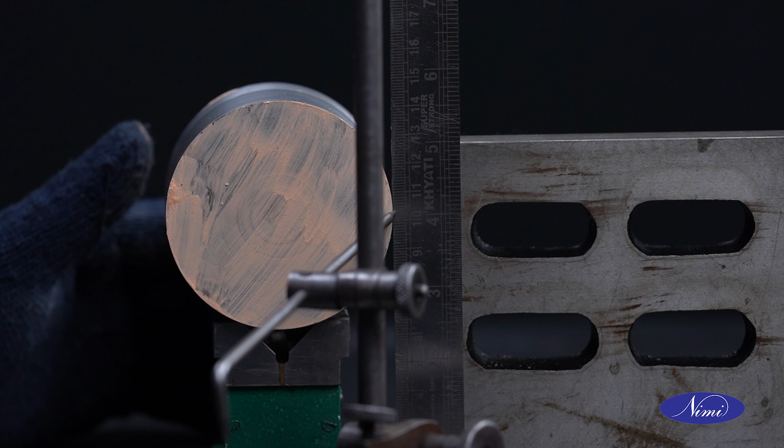Welcome to this session on eccentric marking practice and use of vernier height gauge and V-block. Let us begin with the session.

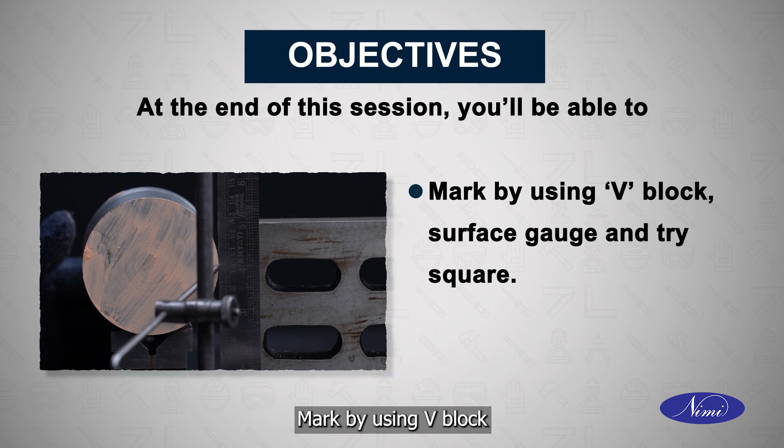Let us now look at the objectives of the session. At the end of the session, you will be able to mark off the eccentric center for turning external diameter, mark by using V-block, surface gauge and try square, and mark concentric and eccentric center lines of a job by using a vernier height gauge.

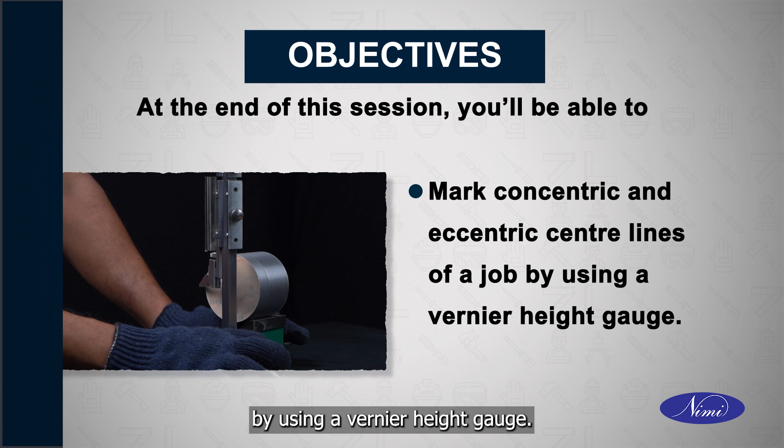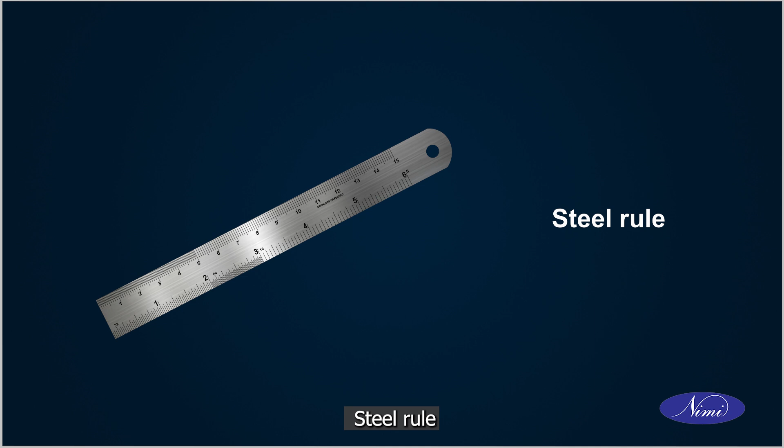Now let us learn how to mark concentric and eccentric center for turning the external diameter by using V-block, surface gauge and try square. The material and tools required for this exercise are V-block with clamps, surface gauge with scriber, marking media, try square, angle plate, steel rule, plain turned MS round of diameter 80 mm, surface table or plate, anvil, ball peen hammer, dot punch and center punch.

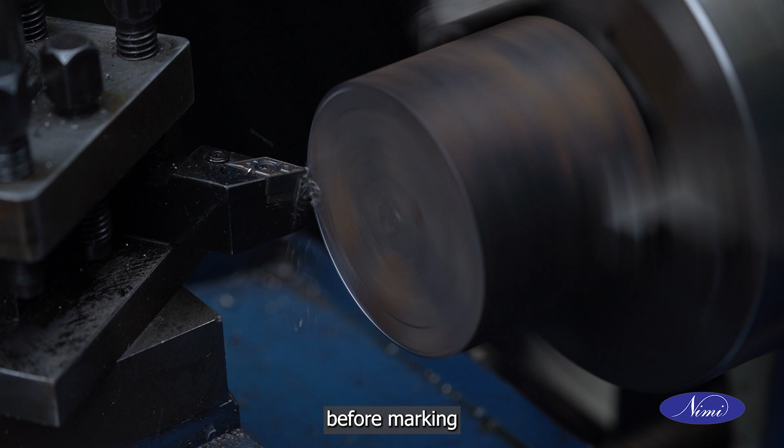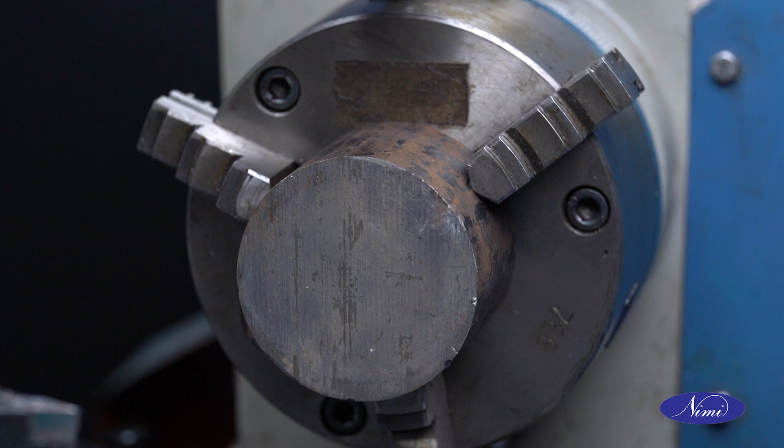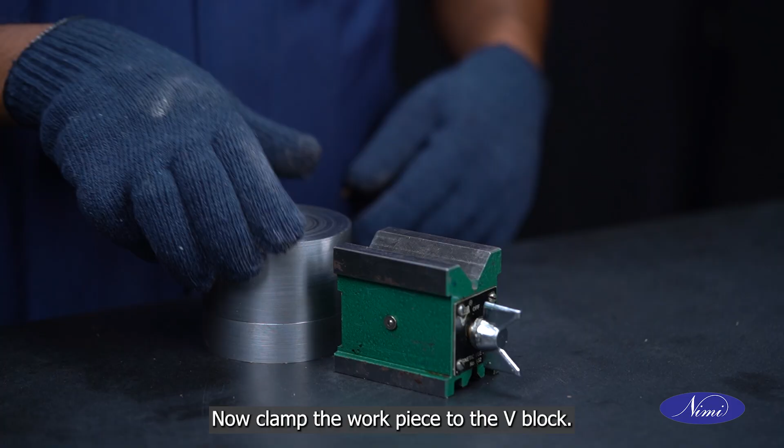Before marking, the job must be faced at both the ends and must be free from burrs and sharp edges. Ensure the diameter of the workpiece using a vernier caliper and check the length of the workpiece. Now clamp the workpiece to the V-block.

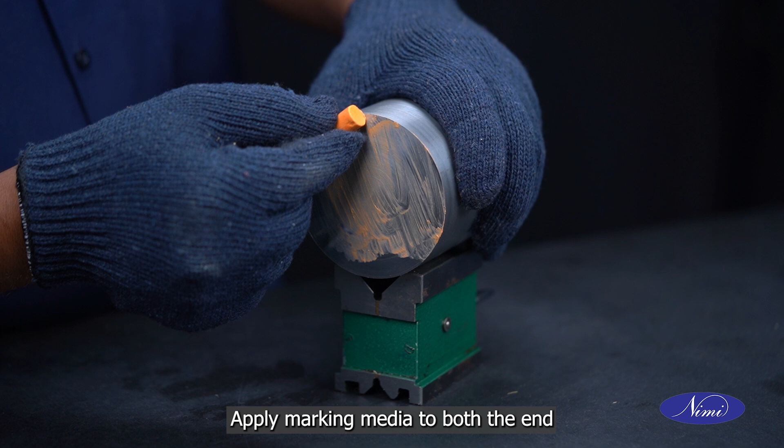Apply marking media to both the end faces of the workpiece.

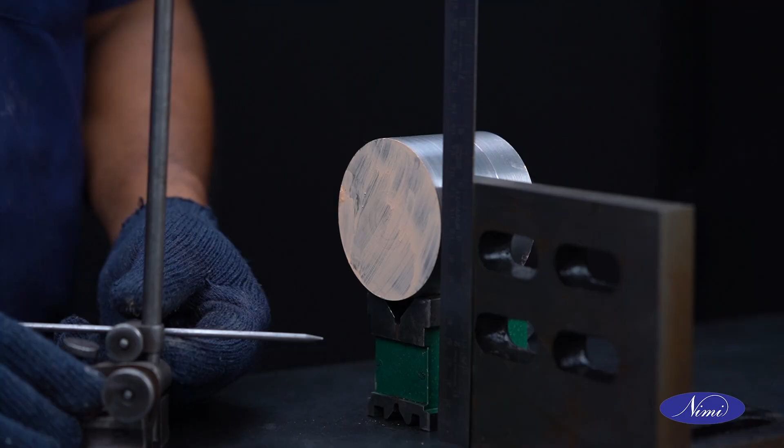Now, with the help of an angle plate and a steel rule, set the height of the scriber to locate the center of the workpiece. Scribe horizontal lines through the center of the workpiece on both the end faces.

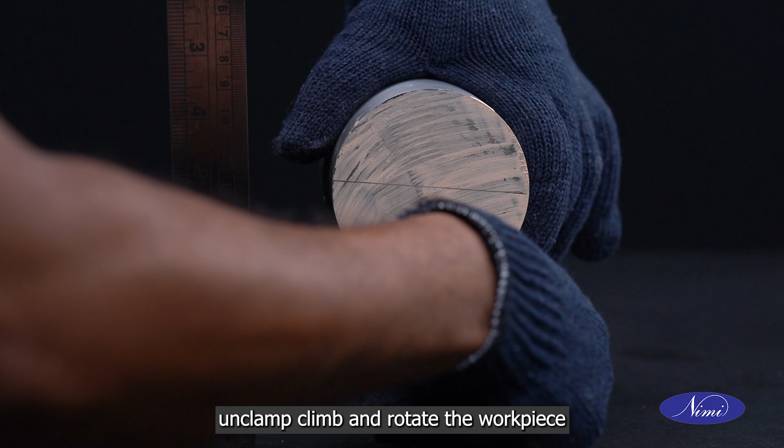Unclamp and rotate the workpiece through 90 degrees by setting the scribed line vertical with help of a try square and reclamp the workpiece.

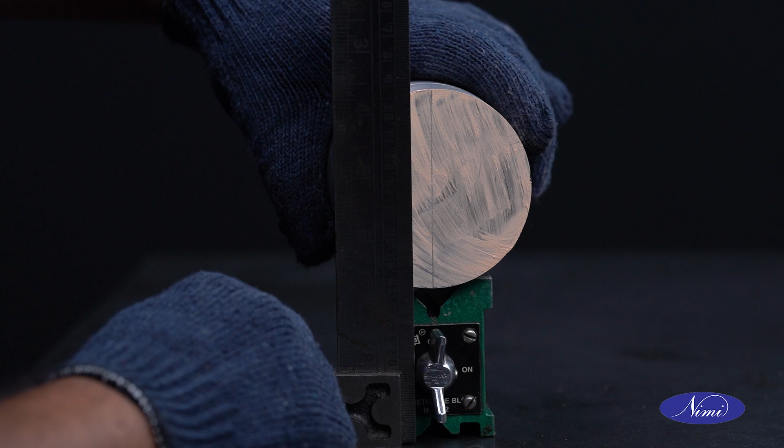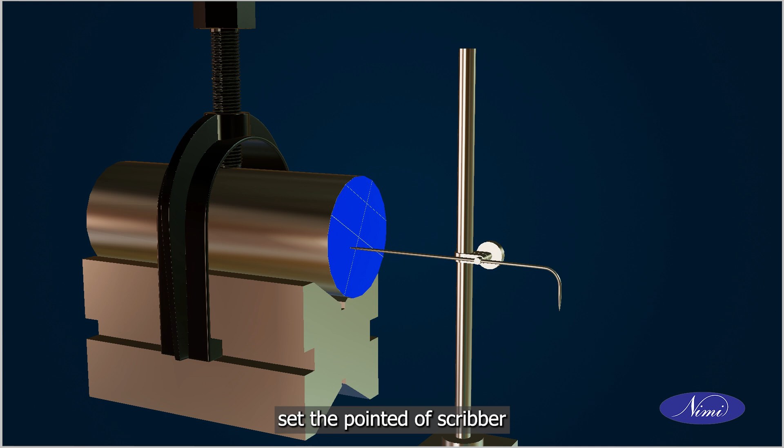Scribe horizontal lines through the center of the workpiece on both the end faces. Now, with the help of an angle plate and a steel rule, set the pointer of the scriber at a distance above the center of the workpiece equal to the amount of eccentricity required. Scribe the line at this height on both the end faces of the workpiece.

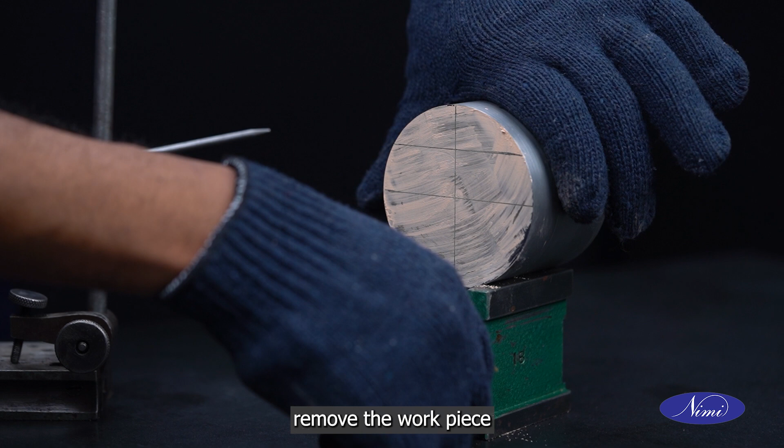Remove the workpiece from the V-block. Dot punch intersection points on both the end faces to locate concentric and eccentric centers.

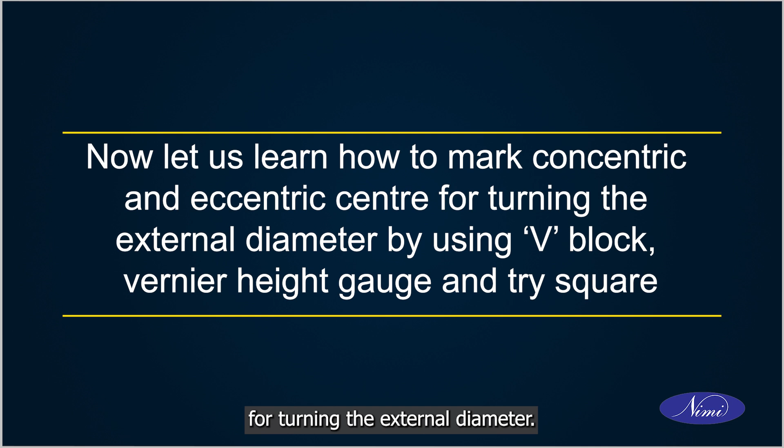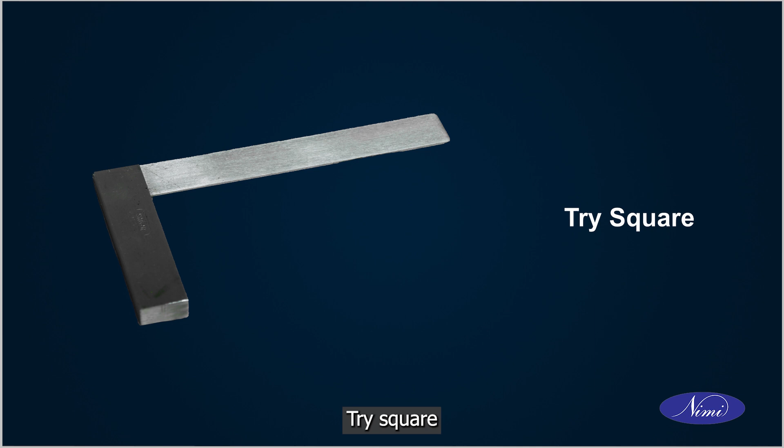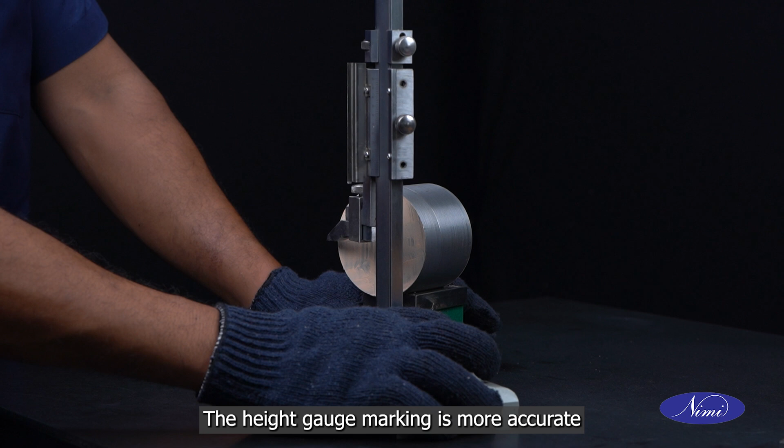Now, let us learn how to mark concentric and eccentric center for turning the external diameter by using V-block, vernier height gauge and try square. The material and tools required for this exercise are V-block with clamps, vernier height gauge with scriber, marking media, try square, plain turned MS round of diameter 80 mm, surface table or plate, anvil, ball peen hammer, dot punch and center punch. The height gauge marking is more accurate than the scribing block marking.

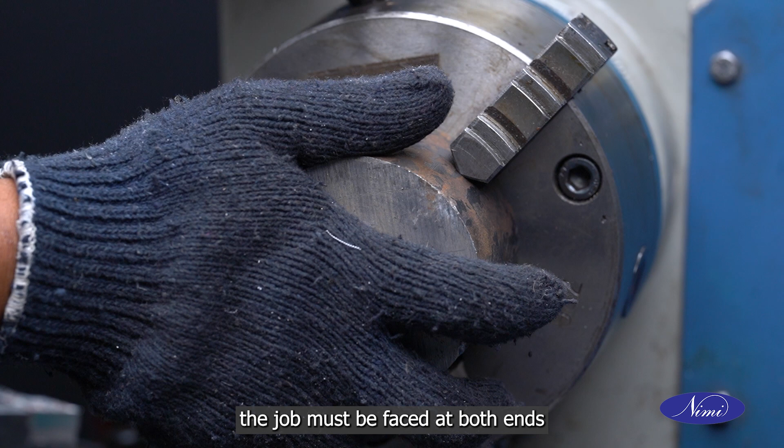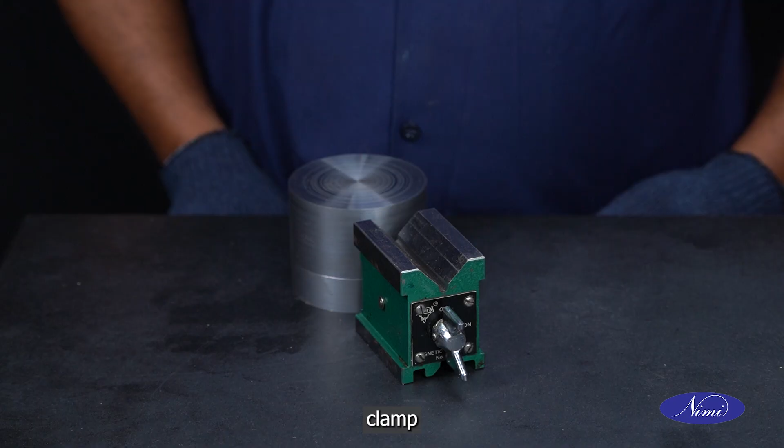Before marking, the job must be faced at both ends and must be free from burrs and sharp edges. Ensure the diameter of the workpiece using a vernier caliper and check the length of the workpiece. Clamp the finished turned rod in the V-block with the help of the clamps. Apply marking media to both the end faces of the workpiece.

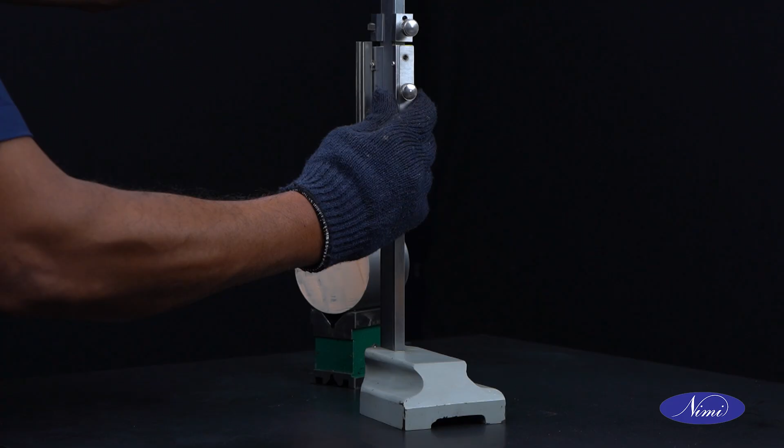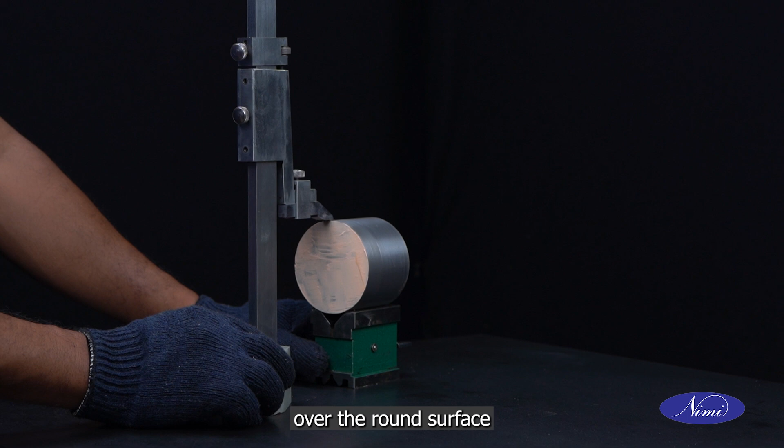Set the scriber point on the top edge of the job. Move the height gauge scriber over the round surface to get a feel that the scriber bottom face is contacting the work periphery. Lock the slides and note down the readings of the scales.

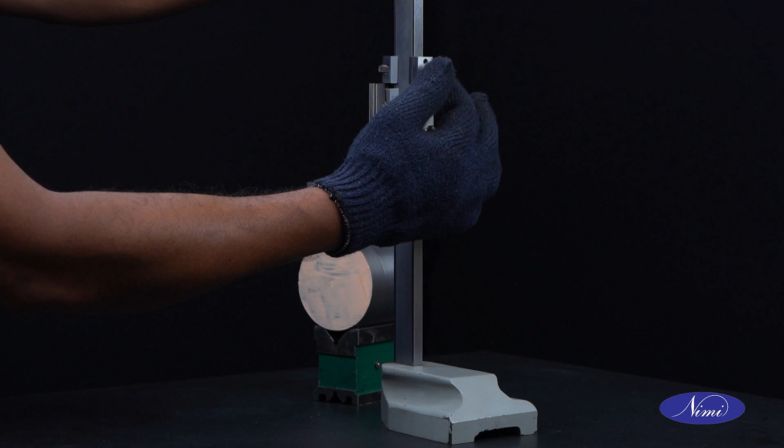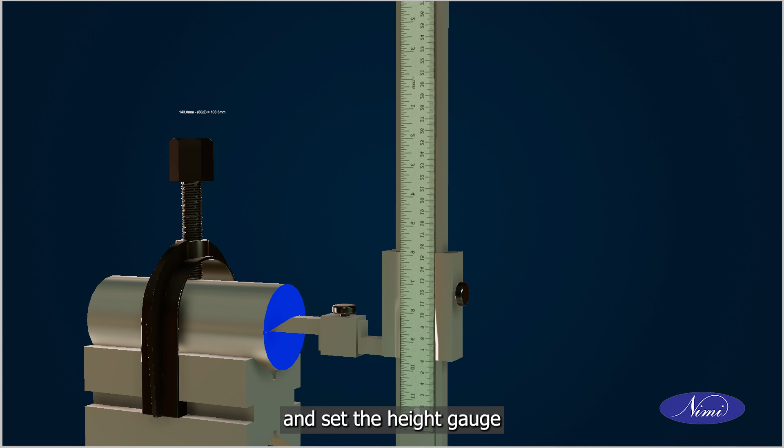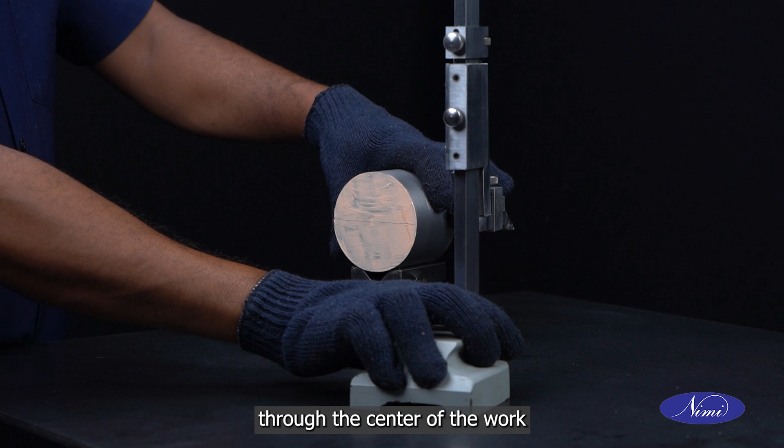Subtract half the diameter from the reading and set the height gauge for that reading. Scribe horizontal lines through the center of the workpiece on both the end faces.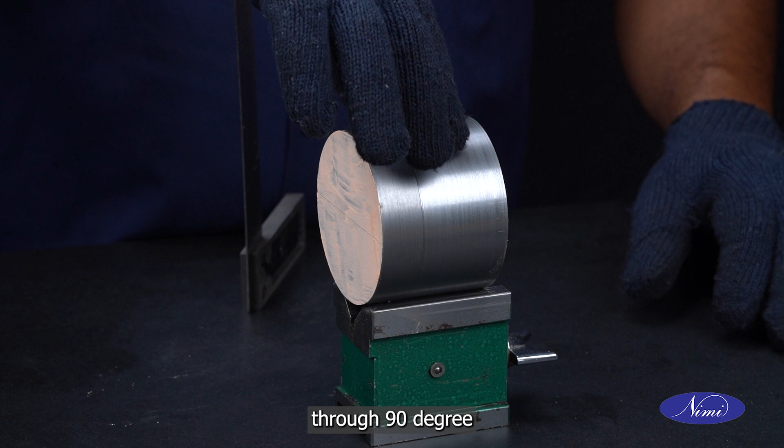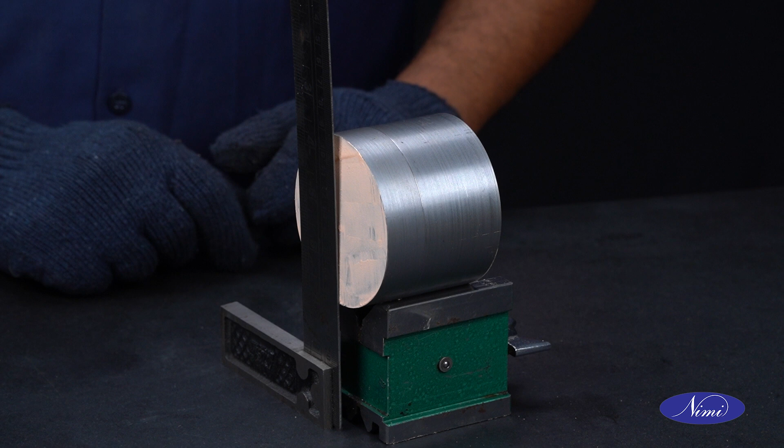Unclamp and rotate the workpiece through 90 degrees by setting the scribed line vertical with help of a try square. Reclamp the workpiece to the V-block. Scribe horizontal lines on both faces with the same reading, which is set for center position.

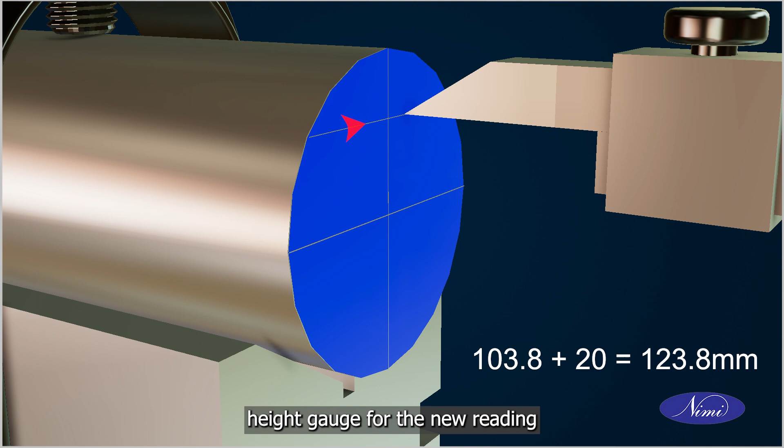Add eccentricity amount to the above reading and adjust the vernier height gauge for the new reading. Scribe the line at this height on both the end faces of the workpiece.

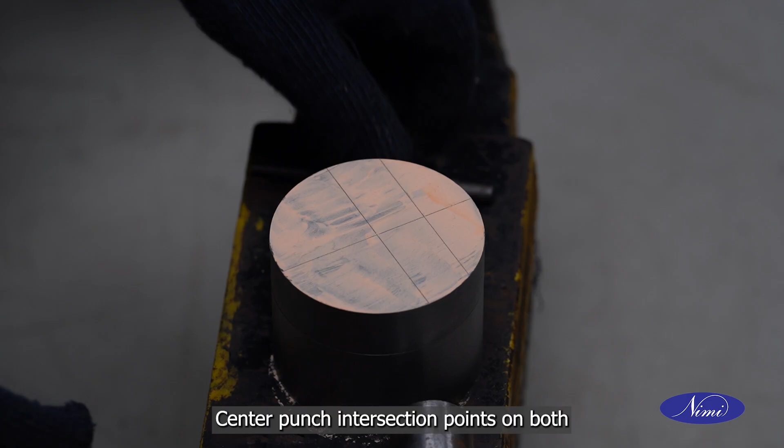Remove the workpiece from the V-block. Center punch intersection points on both the end faces to locate concentric and eccentric centers.

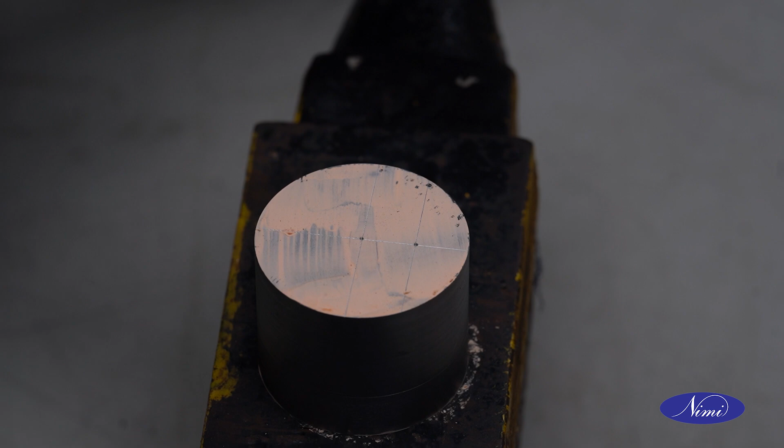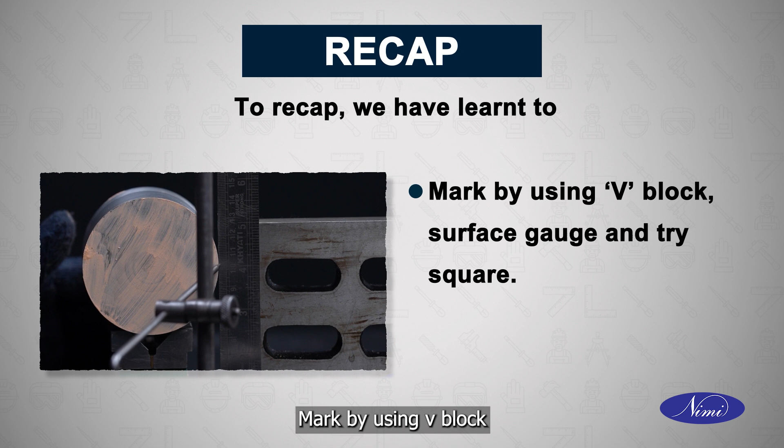To recap, we have learned to mark off the eccentric center for turning external diameter, mark by using V-block, surface gauge and try square, and mark concentric and eccentric center lines of a job by using a vernier height gauge.

So that's all about eccentric marking practice and use of vernier height gauge and V-block. See you in the next session.